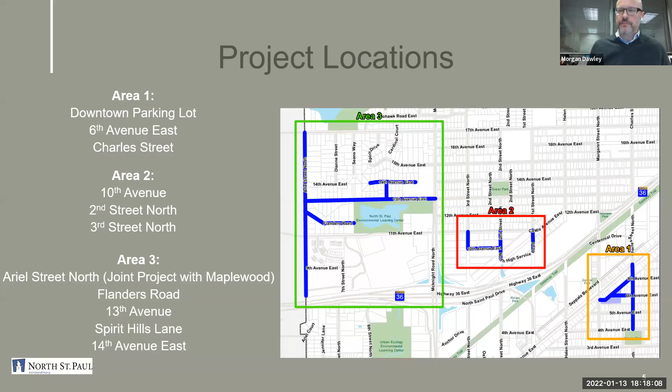So I kind of went through the streets, just a brief covering of the improvements here.

I talked a little bit about this, but in Area 1, specific to the parking lot, we want to replace or reclaim all of the existing old asphalt and repave it. We've got some concrete curb and gutter that is past its lifespan and needs to be replaced. We'll be taking care of that. Obviously, we're going to be restriping the parking lot.

Now we do have an update to the configuration. It's not significantly different to what we are used to seeing out there today, but it does actually add some spots. So we've kind of maximized the area within the parking lot to try to add some parking into it, redoing some of the islands. The city electric department will be redoing the parking lot lighting as well, and installing some electric vehicle charging stations, I believe focused on the west side of the lot, kind of towards the Margaret Street side.

And that also, so we're going to be reclaiming the pavement in the parking lot and 6th Avenue, that short little piece I mentioned earlier. And on Charles Street, it's pretty minor improvement, but we have been doing that throughout the city, and it's called a maintenance overlay.

So it doesn't take a very long time, but it is something where we grind off the first 1.5 or 2 inches of asphalt and then come back and repave that top piece. That basically extends the life of the roadway further so that we don't have to reconstruct it any earlier than we absolutely have to. So it's not as expensive as a full reconstruction, but it does give us some added life. We've been doing that in some strategic places throughout the city, and it's worked really well as a very cost-effective approach of making improvements to our roadways and extending their life. So that's going to happen on Charles, in that piece between 7th and 4th Avenue.

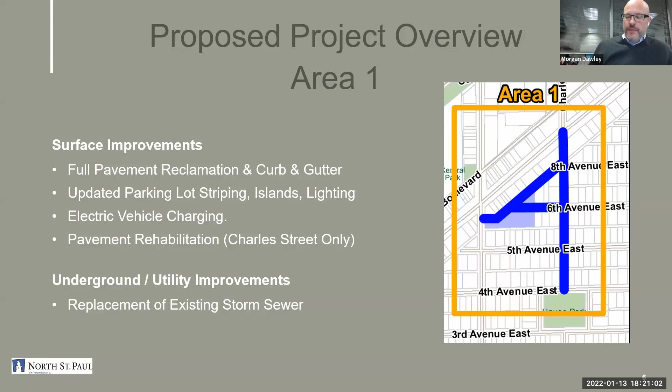So that's Area 1. Within Area 2, very similar - we're going to be replacing some curb and gutter, reclaiming the street pavement. We do have some sidewalk repair in that area to do. There's also not a significant amount of widening, but a minor widening on 10th Avenue. For those familiar with that area, there's some on-street parking on the north side of the roadway.

And it's actually kind of difficult for Public Works to plow that road in the winter. So on the south side, where it's kind of the fields on that side and nobody's front yard is there, we're just going to move the curb over a few feet to provide a little bit extra space so that it's easier for Public Works to remove snow on that section.

And we have a history of water main breaks, so we will be replacing the water main and the services on 2nd, 10th, and 3rd. And then also doing some drainage improvements.

We've got some standing water - at least the most significant place that I'm familiar with is the corner of 10th Avenue and 3rd Street. So we'll be adding and reconstructing again some storm sewer to pick up some of that drainage, which will actually make a big difference in terms of making our roads last longer if they're not holding water, bird baths after a rain event.

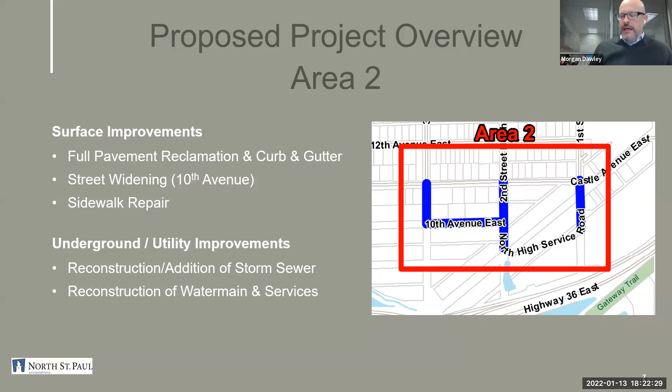That's ideal if we can take care of those drainage issues at the time that we do these types of projects. In area 3, I mentioned the partnership with Maplewood on Ariel Street. Ariel is going to be reclaimed, so it's not a full reconstruction, but we do grind all the way through the pavement. We keep most of the curb and gutter, but where we have failed or settled sections, we'll pull that out and replace it.

Flanders Road is actually failed, so we do need to reconstruct that. It's past the point of being able to overlay or reclaim. It doesn't have curb and gutter right now, so we don't have plans to make significant changes to the character of the road. We're not widening it, but we will fully replace it from top to bottom, which will be a good improvement from what it is now.

13th Avenue, 14th Avenue, and Spirit Hills will be more similar to Ariel, where it's a combination of mill and overlay and a little bit of reclamation, depending on how bad the road is in those areas.

As far as underground work, we do have some water main on Ariel, but only south of 11th Avenue. That's a section with a bad history of water main breaks, so we want to replace that water main between 11th Avenue and the dead end just north of Highway 36. We might also have some storm sewer repairs where we have failed castings, failed structures, and some drainage improvements to make, similar to those other areas.

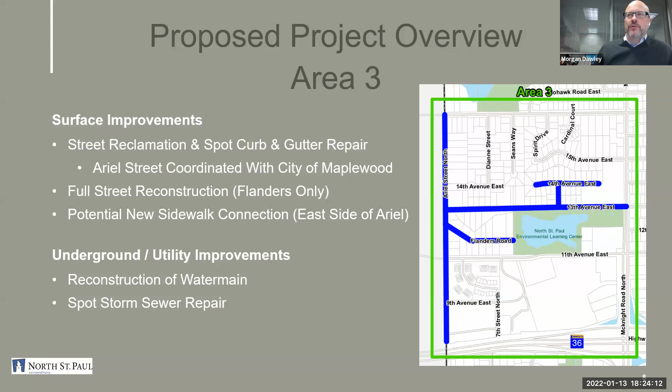So now, breaking the action—I know you guys are probably all really bored with the stuff I'm running through, but it's important to show you kind of what is happening and where.

We've got a poll. There's been some discussion, if you live on Ariel Street, about a sidewalk connection between 11th Avenue on the south end and 17th Avenue on the north end. There's east-west sidewalk on 11th Avenue currently, and on 17th Avenue currently. Maplewood has some sidewalk on 11th Avenue moving west, and they're talking about proposing to add sidewalk on the north side of 11th Avenue with this joint project for the things they're doing on their side of the border. So the idea has come up.

We want to use these public engagement and neighborhood virtual open house opportunities to hear from the residents, just to get an idea of what you think. That doesn't mean this is a set decision—it depends on how people give us their opinion. It's really up to the city council, but we want to share with the city council what we hear from you tonight. So we have a poll set up, and Carrie has put that on the screen.

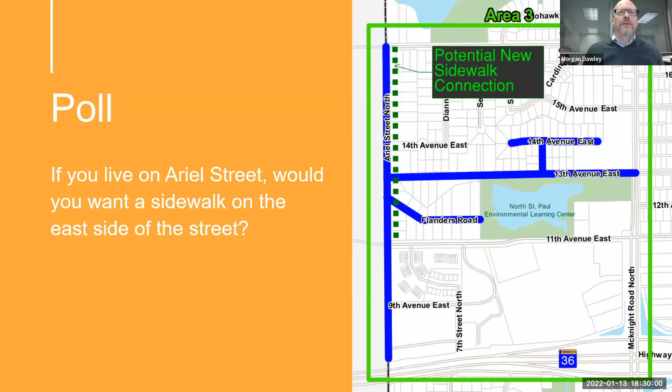Okay, maybe I'll just keep moving. Carrie, is it okay with you if I keep moving along with the presentation? Yes, please. Okay, great. Let me get back to my right window here. So just a comment in terms of how we would proceed with this work.

This is broken up into different pieces. We are planning to put this project out to bid for contractors in this spring time frame, so we'll have more concrete information for the public in terms of when it's going to start, what the schedule looks like, what areas they'll work on first, and then where they'll move on after that. But we don't have that information right now.

What I can tell you is that we always make it a requirement of the contractor to do it in an orderly and timely fashion. When they work in one area, they'll progress in that area and then move on to the next area. We don't want them to start doing things piecemeal and have it spread out all across the city, and then you might see some work and have to wait in your neighborhood for weeks and weeks before you see anything happen.

Now, things do jump around and there might be some delays or times where the contractor is not working exactly on your street, but we generally want them to get into an area, work on that area, generally finish it or get it close to completion, and then move on to another area. Things like cleanup and restoration, maybe some landscaping or landscaping repair, get held off to the very end so they can do those for the whole project all at the same time.

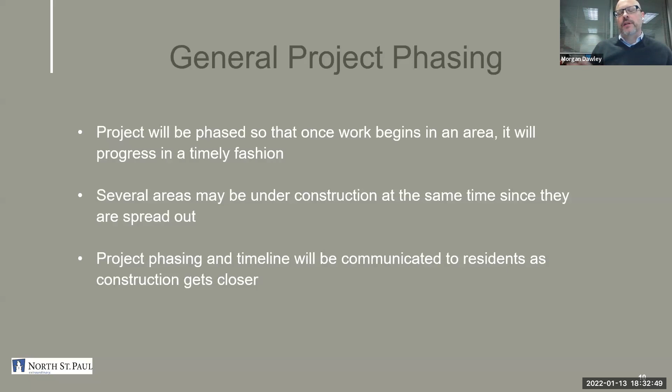We tend to get our best value out of the contractor if we allow them some flexibility, meaning it saves the city money if we're not too restrictive with them. As I said before, once we get more detailed information, which likely won't be until maybe April or May, right before we probably get started with construction, we will communicate that out again to all of the people that live in and around the streets we're going to be working on.

As I mentioned, May is kind of our target start. It's usually weather dependent, depends on how late our winter goes. Usually a safe general bet is we can start construction around mid-May. May 15th is usually a good bet, but sometimes weather holds off and we have to do it a little later. Sometimes we get lucky and we can start earlier. Very rarely do we start in the month of April, but it could happen.

Again, May is usually our best anticipation for a start date for construction, and as I mentioned, it probably won't start everywhere at the same time. We'll try to give more information about where the contractor might start in May, and then if we can have a general sense of where they're going to be moving from location to location as we get through the project. Again, those are all things you'll want to keep tabs on for updates to be blasted out by the city as we move through the project.

We expect that for all these different areas, it'll take most of the construction season - not fully disrupted the whole time in every single area - but they'll be wrapping up in the fall of 2022, usually no later than Thanksgiving. Generally we'd like to see them finished in October. There might be some minor things they're wrapping up into November. But again, we'll provide more detail once we get the contractor's schedule from them in the spring.

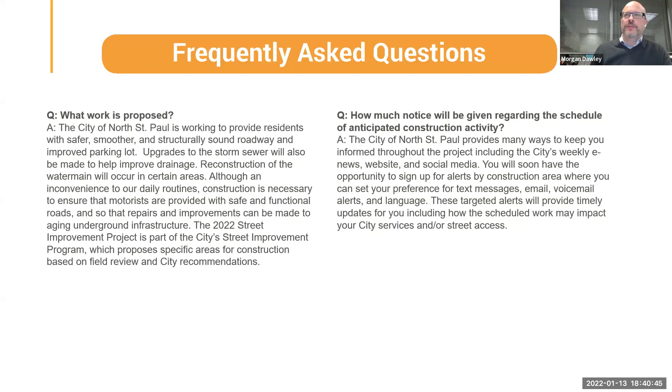Will I have access to my driveway? Generally, you will have access to your driveway for most of the construction project. What the contractor is told is that at any given time, people need to be able to get in and out of their driveways at the beginning of the day, like if you're going to work, and get into their driveways at the end of the day, like if you're coming home from work. That's generally the target we've given the contractor to live up to.

What that means is, if they do need to do some digging or excavation in front of any home or driveway, they'll need to make sure they're letting people know when that is going to occur.

You might not be able to get in and out of your driveway just for that one day or that one specific time where they're doing work on that underground utility. Generally, they're able to fill that back in—it might be a gravel or unpaved surface, but it should be traversable for people to get up and down the road and in and out.

Emergency services are made well aware of what we're doing and when. The contractor is always ready at a moment's notice to fill a hole in if needed, making sure emergency vehicles can get through. They know that's the plan if something is going on. I just want people to know that's what we expect of the contractor.

The other kind of driveway access issue occurs if we need to replace the concrete curb or driveway apron—that interface between the road and your driveway. That new concrete needs to cure, and at a minimum we can't have cars driving over it for about 5 days while it gets stronger and stronger.

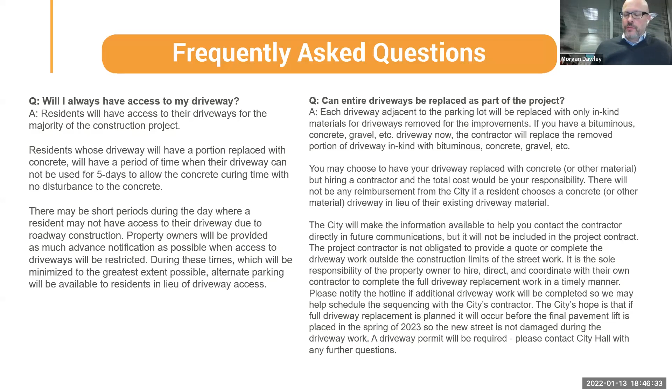If you and your neighbors want to figure out your driveway work, our hope is that you wait until we're done so you can do your driveway work after us. Let our project inspectors know your plan so we can coordinate with our contractor. Also, a permit is required at City Hall for replacing your driveway, and it needs to be issued before your contractor can start. Reach out to our project representatives if you have questions as we get closer to construction.

We'll only replace the end section of the driveway as much as we need to disturb for the project. Sometimes it's only a couple feet, sometimes at most 10 or 15 feet, depending on factors like slope and whether a water service needs to be replaced in the driveway.

A lot of times we get questions about where the right of way is. The right of way is the section of land the city has rights to, for things like city streets, underground utilities, power poles, street signs, and other public infrastructure. Generally that's where your private property ends and the public right of way begins, and it's not always right at the edge of the street. Usually the right of way within the city is about 60 feet wide.

On a typical street, that means about 10 to 13 feet behind the curb or edge of the road - that section of grass you mow and maintain - is part of the right of way, between the edge of your private property and the edge of the road. That's the area we'll tend to only need to work in.

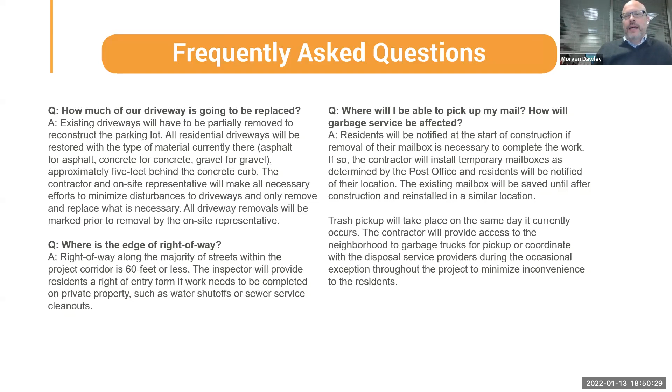Trash pickup should be the same as you're used to. The contractor will move the trash bins from the end of your driveway to another location if needed, as established by the trash hauler, and then move your container back. We may ask you to put tape or another identifier with your address on your trash bin, so people get their bins back to the right address. That's the contractor's responsibility.

Working hours will be between 7 and 7 Monday through Friday, that's by city ordinance. On Saturdays, which is not a guarantee, they have the ability, but a lot of times they don't work on Saturdays, but the working hours would be between 9 and 5. No work is allowed on Sundays or holidays unless they have special permission from the council. I don't expect we'll be getting into that at all, so I think those are the hours we'll probably be expecting to see on these projects.

Let's see, lawns and areas with grass that are disturbed. Most lawns on this project are probably not going to be disturbed, if at all, it's only going to be maybe a few feet behind the curb where the curb is going to be replaced. But we want everybody to be aware that the contractor is responsible for that sod, or if it's seeding for a very small area, for the first 30 days. After that, it's the homeowner's responsibility.

We'll provide more information with respect to grass removal and replacement as we go through the project and process. But just know that if it's a maintained lawn, we're going to do our best to put it back the way it was before you started. New grass and new sod does look different, the greens don't always match. It takes a little while, sometimes a couple of growing seasons, for it all to blend together, but we'll do our best and provide some tips and tricks in terms of how to take care of that new grass.

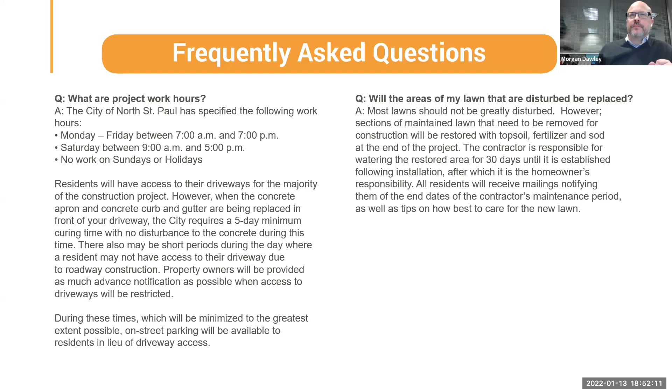As I mentioned, lawn irrigation systems, underground dog fences, and landscaping items - those are all things we hopefully want to know about ahead of time, as best as you can communicate them to us, and we'll try to protect those. If we do need to disturb them, or if they accidentally get damaged during construction, which does happen, we have allowances within the construction contract to have those repaired at no expense to you. So if something happens, please let us know. Better yet, before we even start the project, if you have special landscaping or an underground sprinkler system, let us know again on the hotline.

Also, if you have things close to the road, like a bed of hostas or some flowers, or a special landscape feature, a wagon wheel or something like that, and you want to kind of take control of that and get it out of the way, certainly please do. We do our best to restore things, and we have the ability to do some restoration with respect to landscaping, hostas, simple things like that. But if there's something you think is really important, we've had residents go in there before the start of the project and maybe transplant some things or pot some things, then bring them back. If they've got a green thumb, I think they appreciate that opportunity. So I certainly encourage you to do that if you'd like, and if you need more information about timing, you can always reach out on the hotline as we get closer.

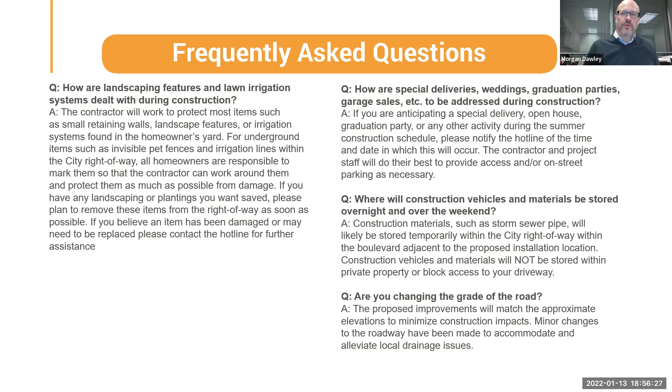If we do make improvements, it's going to be on 10th Avenue, where Public Works has a hard time plowing, so we're moving the curb line there. But that's really the only one I can think of. Most of the other edge-of-road things will be about the same, and most heights, elevations, and grades of the roads will be about the same, unless we're trying to fix a drainage situation.

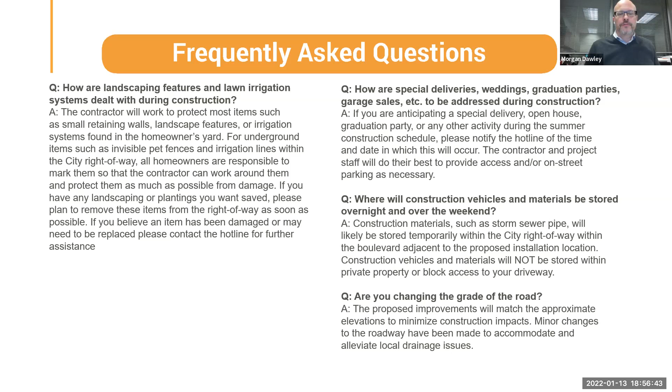So I think that's the last slide. I know I went a little long there. We've got a little time, and I'll stay as long as needed to answer any questions. We've got plenty of people in attendance, so if anyone would like to type a specific question in the Q&A section, or hit the raise hand button, we can unmute your microphone and try to answer your questions that way.

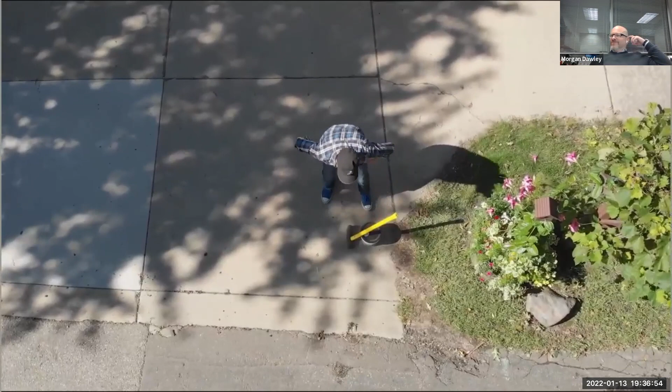Ah, what a beautiful day in Anytown, USA. The sun is shining, the birds are chirping, and the people are peopling. Well, it looks like Anytown's inquisitive neighbor, Chuck Busybody, is working on a home improvement project. Let's say hello. Hey Chuck, what are you up to? Yes, it looks like your street is scheduled for reconstruction this summer. Chuck, what are you doing? You should really let the city... Wait, is that a jackhammer? I don't think that was the best idea, busybody. You should really leave the construction work to the professionals.

Calm down, Chuck. Yes, the street reconstruction process can be confusing, and I'm sure you have a lot of questions. You may wonder, how long will this take? What will I see? What will I hear? Why are there tiny flags in my lawn? What happened to my mailbox? And how do I get my hands on a cool hard hat and safety vest? Well, never fear, busybody, I have the answers you're looking for. Let me tell you a story.

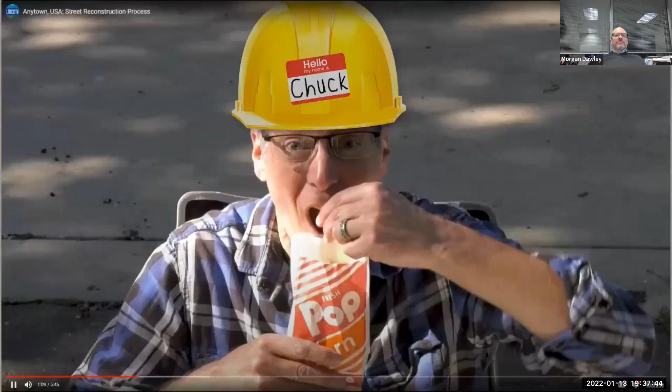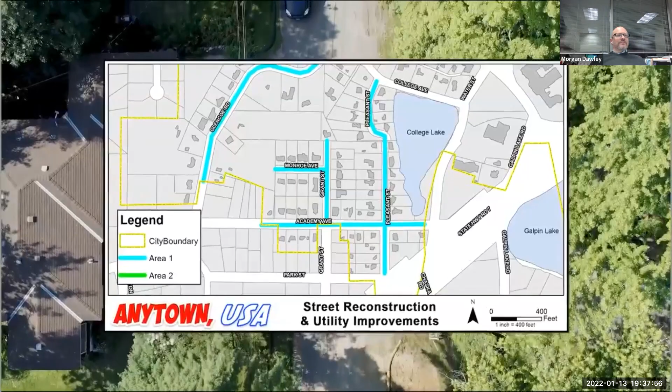Street reconstruction is an inconvenient yet necessary process that begins many years before any work is done. Your city will determine which streets and utilities will be replaced 5 years in advance. Early in the process, neighborhood residents and businesses are invited to a meeting to learn about the project and are encouraged to provide feedback to the city.

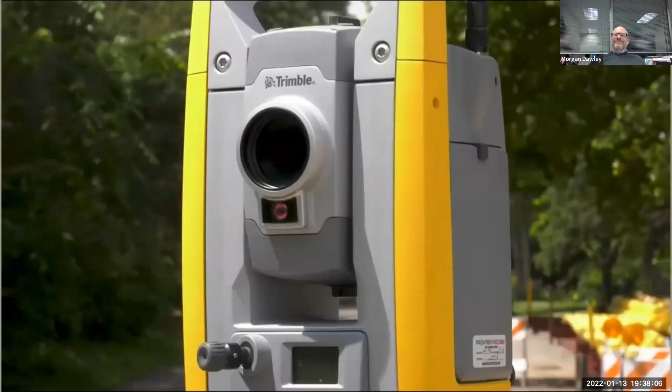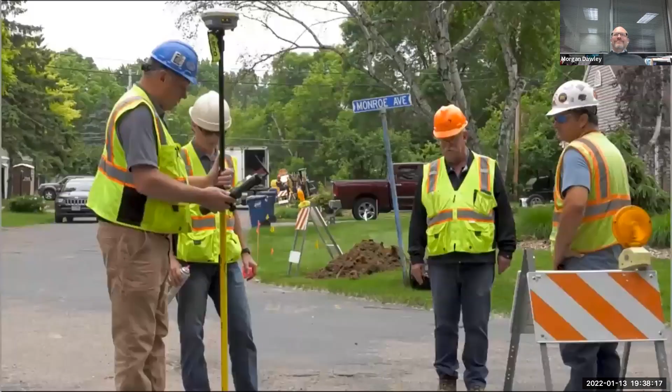Once the project is approved by the city council, survey crews will be on site during the fall, the year before street reconstruction begins. There they will gather data to create construction plans to help guide the project through to completion. The following spring, the city council will select a contractor and then create a preliminary construction schedule that will be shared with property owners. Are you following along so far, Chuck? Not really. Perhaps you should take some notes.

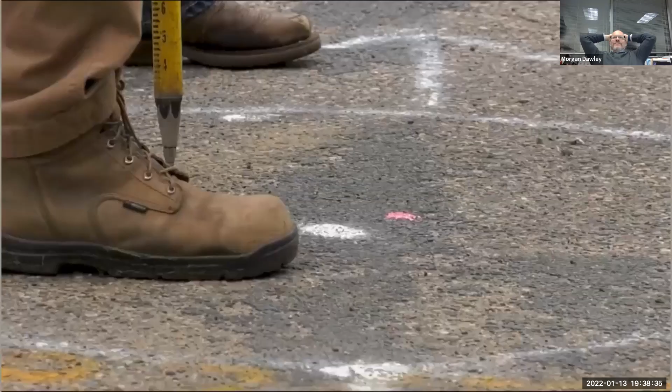During pre-construction, survey crews and private utility companies stake and flag the project area. This is done so that crews know where things are located during construction.

Temporary mailboxes may need to be installed just outside of the work area during a total street reconstruction. The post office will decide the date and location of the move, and the project contractor will notify impacted homeowners when this is scheduled to be done.

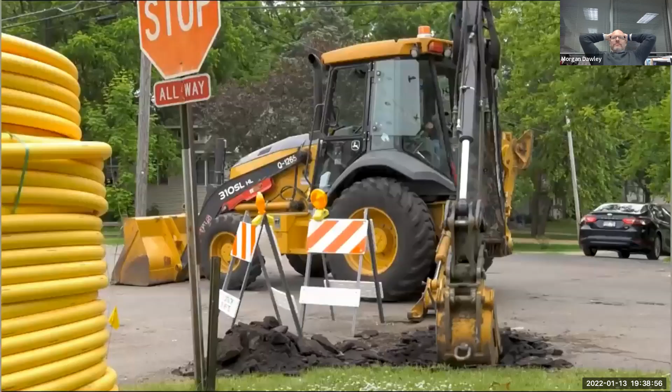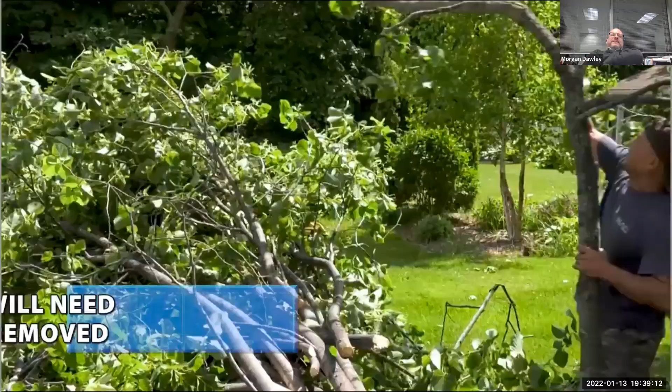Additional prep work involves utility companies using excavation equipment to make repairs and improvements to existing utilities such as cable, electric, and natural gas. Saw cutting of driveways will take place during the pre-construction period as well. In addition, diseased trees or trees in the right-of-way will need to be removed prior to the start of the project.

What was that, busybody? I don't think the crew needs your help removing trees, right guys? That's what I thought. Chuck? Never mind.

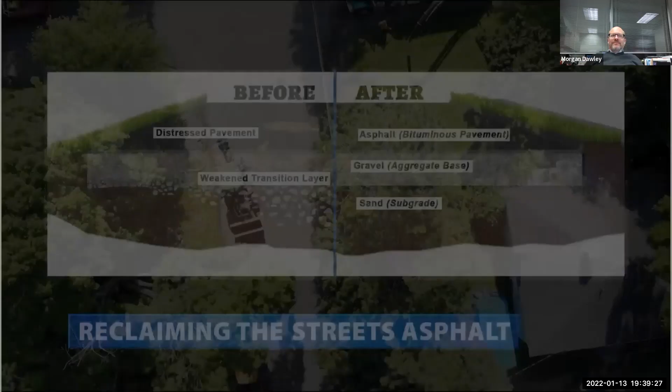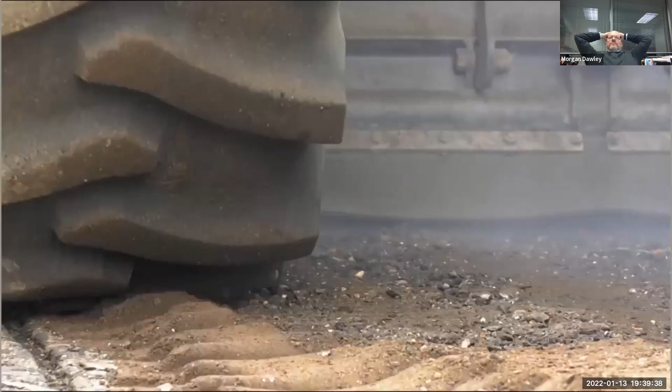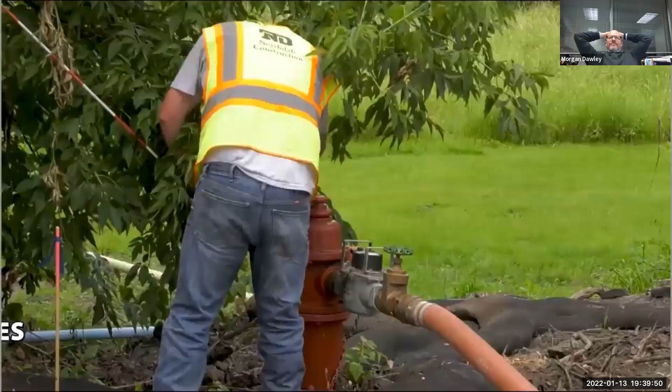The first step in the road reconstruction process is reclaiming the street's existing asphalt. The surface material is ground and mixed with the current gravel base to create a new foundation for the asphalt surface. After the asphalt is removed, residents should still have access to their homes and driveways, but please keep in mind that the roadway will be a bit dusty and bumpy at this point in the project. Next, temporary water lines will be connected to homes throughout the project area, causing periodic water main shutdowns.

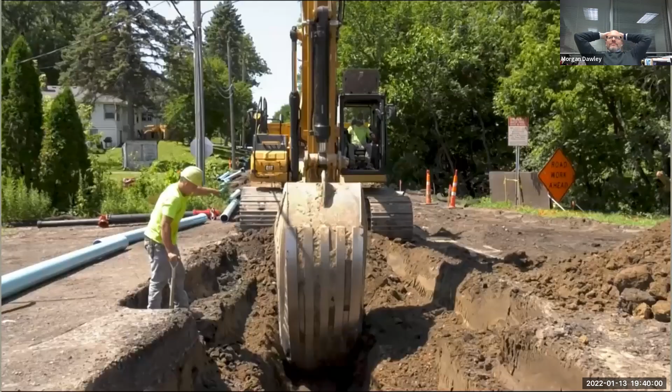The lines will look like a garden hose and will be tested frequently so that it is safe to drink. During a total street reconstruction, existing sewer and water mains will be repaired, removed, and replaced. Crews will replace pipes connecting each property to the sanitary sewer and water main in the street.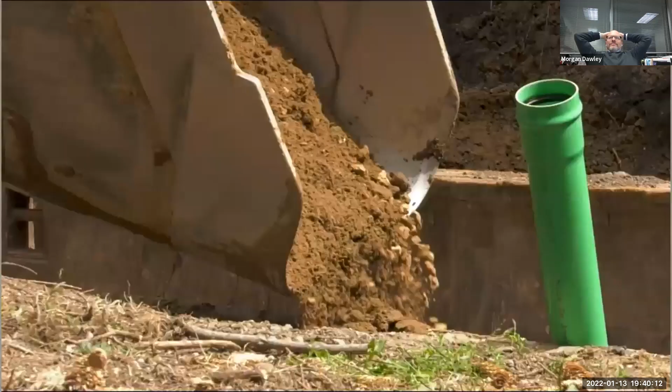Once water mains are replaced, storm sewer installation begins in areas needing drainage improvements. The city will also dig out and replace any old manholes and catch basins during this phase of construction.

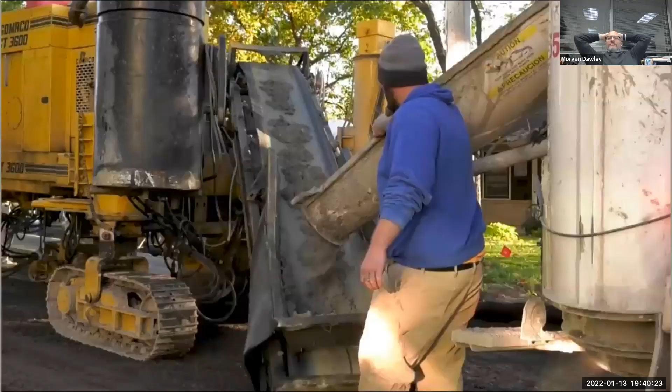After utility work is done, new concrete curb and gutter is installed. Any damaged or removed driveway aprons are also replaced at this time. This may limit access to driveways for up to a week, but residents will still be able to park near their homes.

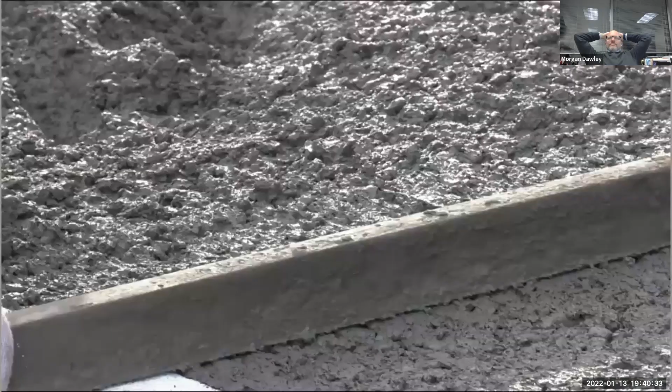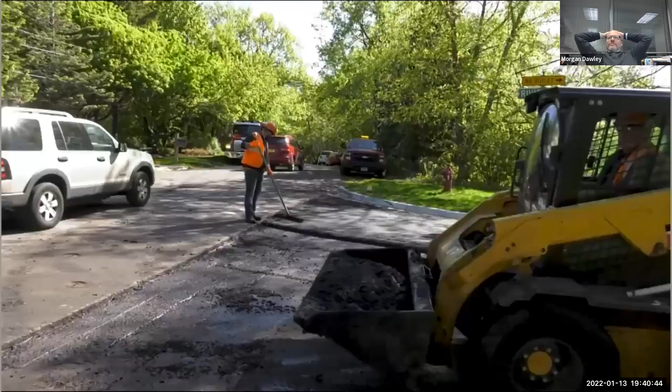Once these stages of construction are complete, the first layer of asphalt is placed, and the road begins to take shape. Crews will do their best to keep the roads open during the paving process.

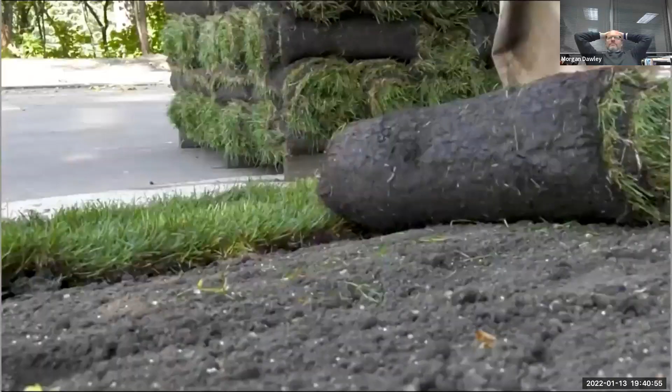The boulevard restoration process begins after the initial paving. Crews will install organically rich topsoil and sod along the curb line. Landscaping repairs are also done at this time.

The last stage of construction is the installation of the final layer of asphalt. However, the final layer is most often paved in the spring in anticipation of road settlement.

While living in the project area can be frustrating at times, I hope this summary gives you a better understanding of the process. Be sure to stay informed and sign up for weekly email updates from your city.

Making sense now, busybody? Excellent! Now you're coming up, aces! That's right, Chuck. Unforeseen surprises can and will cause delays at the construction site. The biggest culprit is severe weather. Clear skies can turn dark quickly, bringing work to a grinding halt. Additional time can be lost waiting for the street materials to dry or work having to be redone. Other project delays can be caused by equipment breakdowns, poor soils, and unexpected archaeological finds.

Wait, is that the Ark of the Covenant? Well, busybody, I hope you have a better understanding of the street reconstruction process. Great! Oh, that's a very nice gift basket. For me? Perhaps the crew would like it. No. Why don't you hold on to it for right now, Chuck? The guys will pick it up later. Well, my work is done here. See you later, Chuck, and good day to everyone in Anytown, USA.